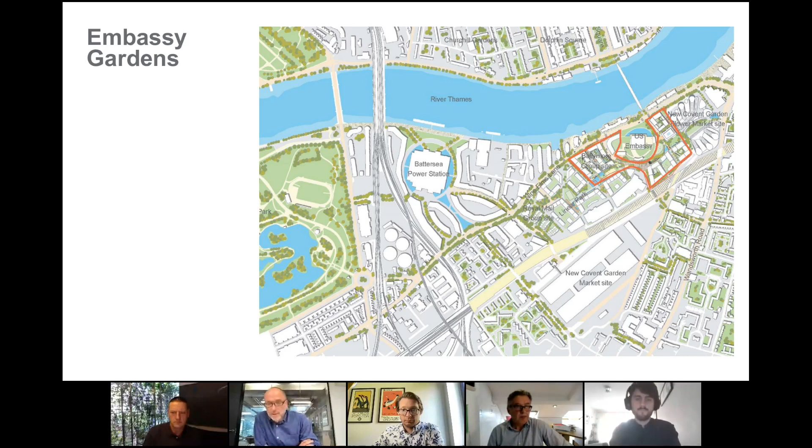It's also a critical part of the delivery and involves all the developers and landowners managing to communicate and talk to each other - this idea, which is picked up in the Farrell Master Plan, of a linear park, again linking Vauxhall Bridge to Battersea Power Station. In terms of the diagram, the blue dots are the Thames, the black dots at the base are the railway line, the Waterloo railway line. This idea of the park pulling people off the busy Nine Elms Lane, so pedestrians and cyclists use that link.

We worked alongside fellow architects AHMM and FCB on the first phase of the residential build, which was completed in 2012 for Ballymore, with the shared ownership building alongside for Peabody. These are essentially simple residential buildings which belie the density of the scheme and are rooted in its interaction with its location - brick buildings to ground, around raised courtyards, a southern facade with extensive views out over London, generous balconies over the new linear park.

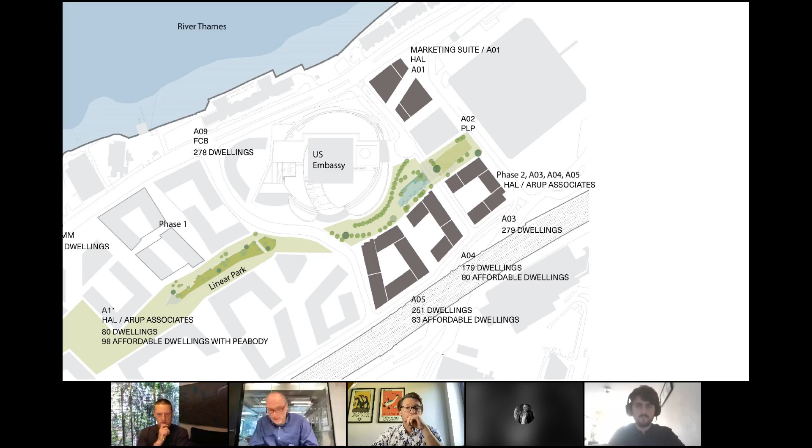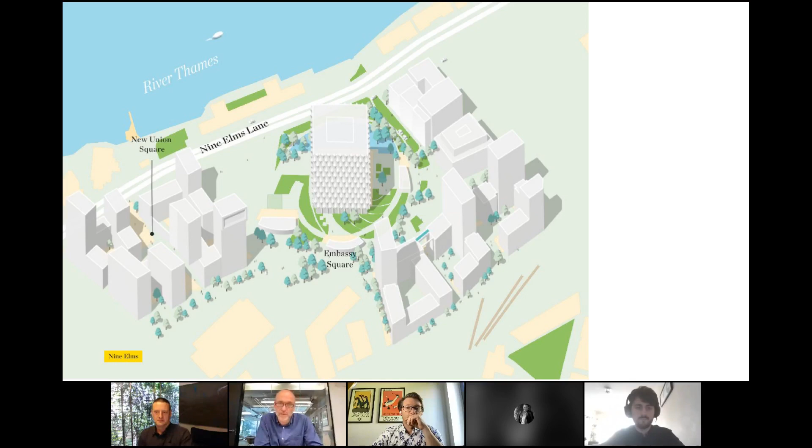When Ecoworld Ballymore asked us to help develop the next phase of Embassy Gardens, about 900 apartments across 3 buildings, we looked carefully at how it was integrated with the overall estate, building on the architectural language of phase 1. Someone's referred to it as a scheme of bricks, balconies, and bridges, and Skypool sits within the balcony, certainly within the bridge element of that.

As part of the client's brief, we were asked to provide a high level of amenity, such as pools, gyms, cinemas, working from home areas, and so forth, which was new to us - an offer more akin to a high-level hotel than a residential offer in our experience, presenting some new and interesting challenges.

As part of the phase 2 offer, we were asked to look at creating a 25-metre pool at level 10. So we're now going to talk about how the idea evolved.

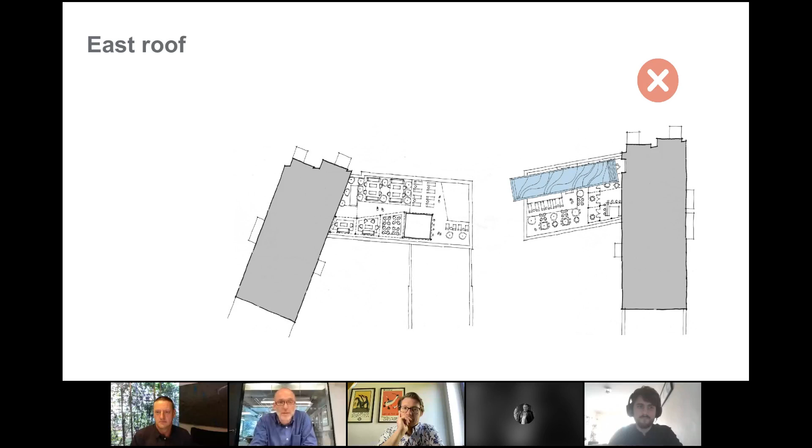We've got buildings to the left and the right, the pool shown to the right-hand side, the 2 roof areas with the gap between. If we placed it to the east, it wasn't going to fit. If we placed it to the west, it could just about fit, but there were concerns about the adjacencies of plant and not having enough room to breathe.

That led us to thinking about a bridging structure, placing the pool between the 2 buildings. The idea of a high-level swimmable bridge was born, which also had the advantage of providing direct access to the pool from both left and right.

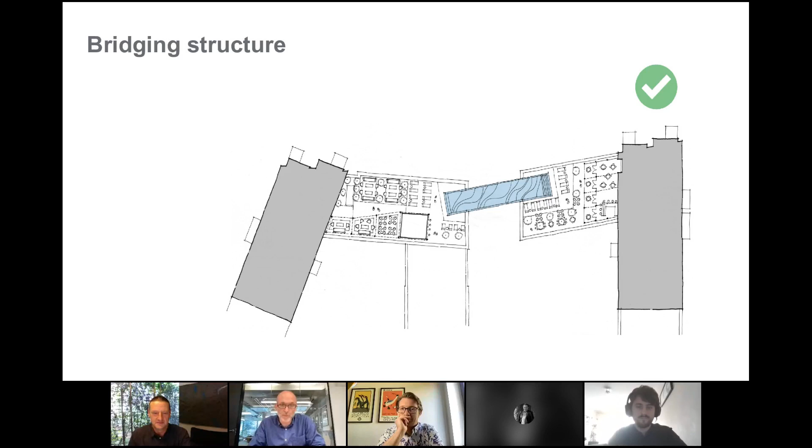The idea of a bridging structure holding water, or an aqueduct, was discussed at early meetings, and while we knew it was doable, we knew there were significant complexities in linking the 2 separate buildings. Graham and Sam will look at this later in terms of the settlement between the 2 buildings, one building being built before the other, and the difficulties in terms of movement between the two. There were also, as usual, challenges in terms of the cost plan, and we didn't really account for this pool in the original thinking and scope.

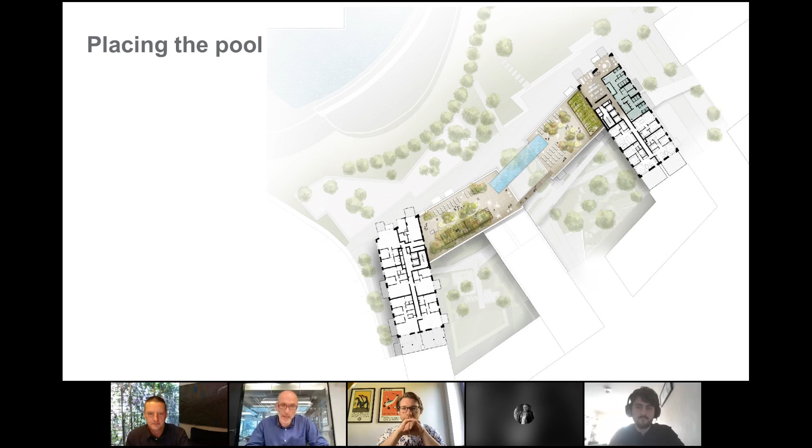The initial conversations centred more on an enclosed aqueduct filled with water for residents to swim across. The idea was that this would also create a framed entrance between the two buildings into the central courtyard from the American Embassy side, providing a striking landmark to waymark the entrance.

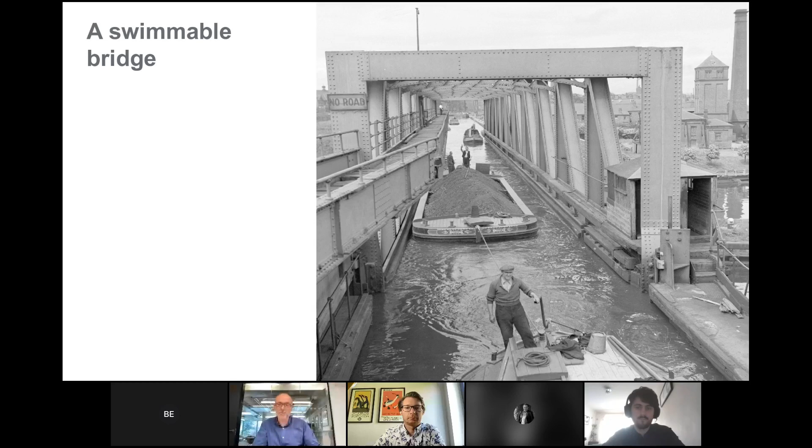Having established the idea of the swimmable bridge, we then began to think about views in and out, and the potential for taking advantage of both views across Embassy Gardens and to the north, across to Chelsea and into the West End. The discussion evolved towards providing windows to the structure, to allow swimmers to see out and passers-by to see in.

When we were discussing this with the client, in particular with Sean Mulryan, the chairman of Ballymore, and Peter McCall, who's the head of construction, the message was unequivocal. Sean said if we're going to do this, let's do it properly - it needs to be transparent. I remember leaving that meeting thinking, well, that's not going to work. While transparency was a brilliant aspiration, it was also a real headache.

We evolved initially a steel and glass hybrid, but the complexity in terms of detailing soon became starkly apparent. We'd end up with so many stainless steel fixings and the lamination, which would lead to further refraction through the glass, that the big idea - this brilliantly transparent vessel shimmering between two buildings - would be entirely lost.

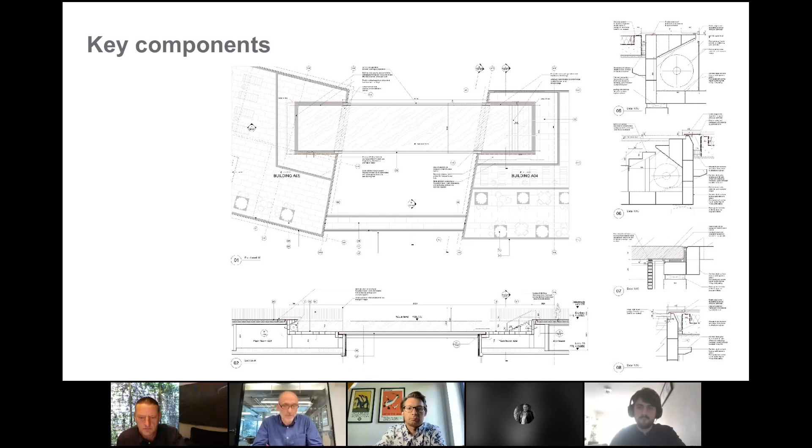The three elements - the clear central section and the stainless steel tubs to either end - are shown on the cover of the Skypool brochure, which we developed during the early stages to help us and others better understand the process. That process will be further picked up later on by Eckersley O'Callaghan.

In the meantime, a work in progress CGI found its way into the Evening Standard property section and attracted an extraordinary amount of interest. So while the concept was simple, it was clear that its implementation was anything but. I think it's fair to say that at this stage of the project, none of us were entirely sure that the image could be delivered, which is where Brian picks up the story.

Thanks very much, Hal. Can you hear me? Give me a nod or a thumb. Yeah, I am Brian Eckersley, one of the founding directors of Eckersley O'Callaghan.

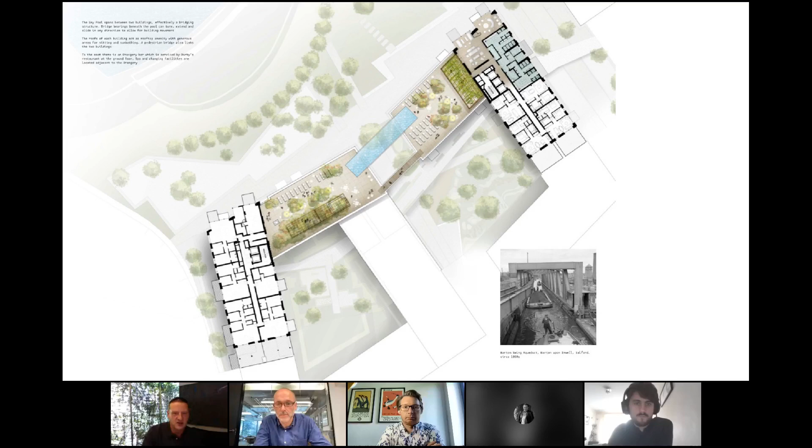So these were essentially the images that we were presented with - how to build something like this. And the reason Hal and Ballymore came to us - here we have the plan which shows the transparent structure spanning 15 meters between two buildings. As you can see, there's 5 meters of pool sitting on the building at each end, and this 15-meter span in between of transparent structure. It also doesn't span perpendicular to the two buildings - it spans at a skew angle, so that introduces some additional engineering and analytical complexity.

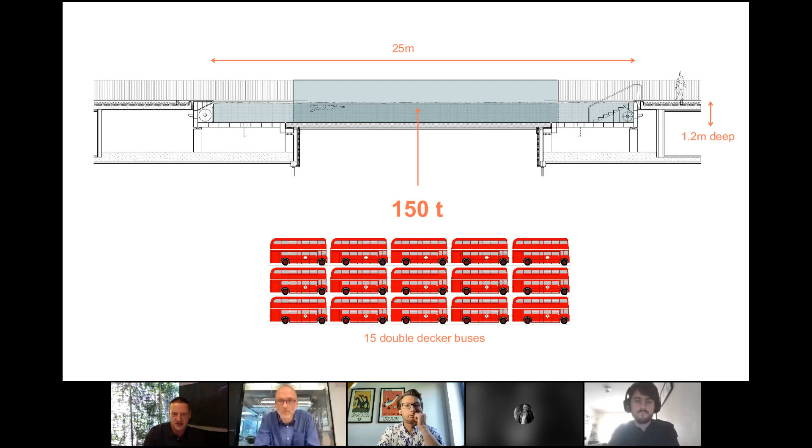And here we have it in section. In total, the pool is 25 meters long, 15 meters clear spanning in the middle. It carries 1,200mm deep of water, and there is this stainless steel tub at each end, which Hal described earlier, which forms the overall 25-meter length. It's 35 meters up in the air, 10 stories. In total, that is a weight of 150 tons of water, and as all good Londoners know, that is the equivalent of approximately 15 double-decker buses.

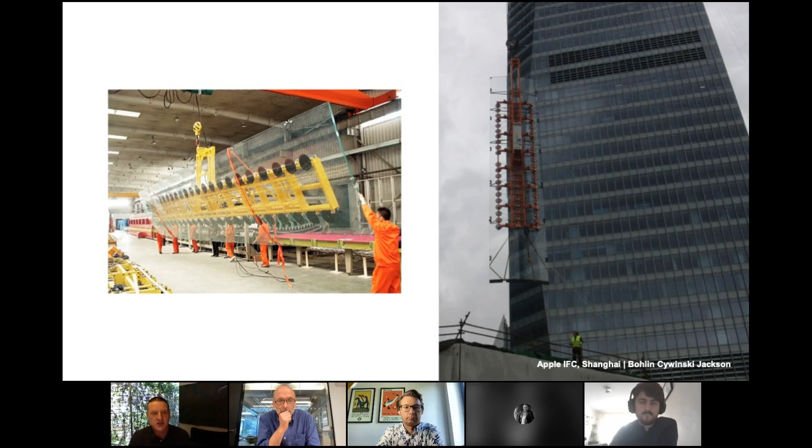Here we have what were at the time the world's largest laminated curved toughened glass panels, made for this project at IFC Pudong in China.

But of course, glass needs to be jointed, sometimes using fairly complex bolted connections. And for the engineer, that's where we have the most trouble proving that glass structures will work. These have to carry significant loads and ensure the safety of the occupants of any glass structure.

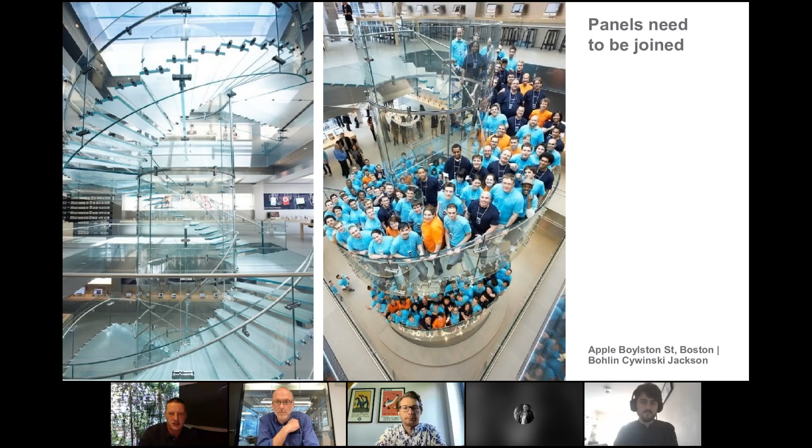So for Skypool, our first instinct was that glass would be the appropriate material to make this structure work. We did develop an early solution using glass, something like this. This simplifies it rather, but essentially there were these 2 big glass beams which formed the side walls of the pool. They picked up secondary glass beams spanning in the short direction, and those in turn supported glass panels along the bottom.

Then, in order to prevent the water pressure from pushing the big glass beams outwards on the side, we had these horizontal glass shelves which would restrain that load.

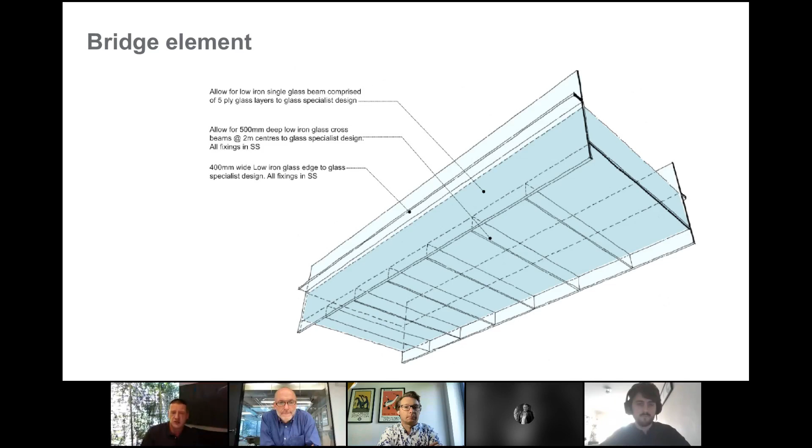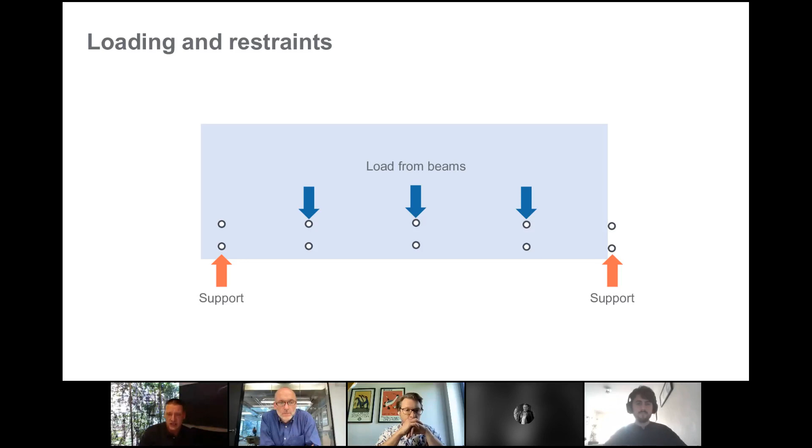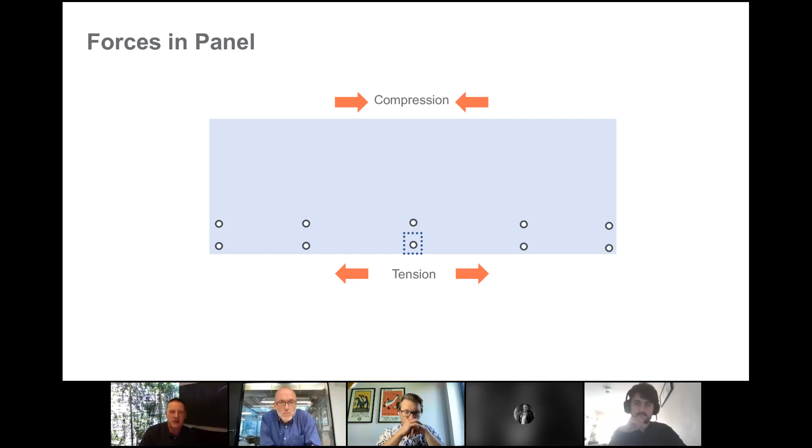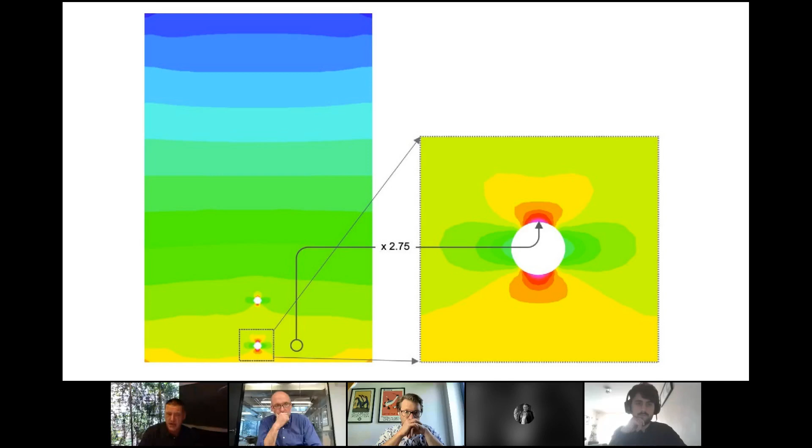But as you go through that solution, the loads at the end of each of those beams all need bolted connections. The stresses around those connections add to the stresses in the panels due to them acting as beams and carrying the load in the other direction, as well as the hydrostatic loads. You then get increasing stress concentrations around the holes, so the bolts need to get bigger and bigger to deal with those stress concentrations.

Here is one of our other staircase projects, where the balustrades of the stair act as glass beams, spanning about 12.5 meters in this case. You can see the connections needed just to carry glass treads, which become not visually insignificant in the overall effect on the structure.

And as well as that, even in carrying these loads, we have 5 pieces of glass laminated together to make a safe beam in this situation. As you add pieces of glass together, it gets more and more green, less and less transparent.

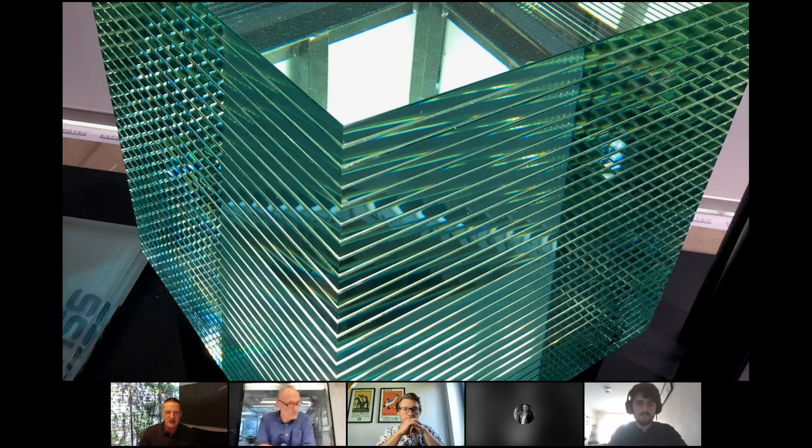Now, the Skypool solution wouldn't have needed as many pieces of glass laminated together as this, but you can see the visual effect. Transparency is reduced, the bolts further reduce transparency, the structure gets heavier and heavier. That means you need more structure to carry those loads, so you end up chasing your tail. It didn't really seem like the right solution.

So it was actually Graham Colt, our technical director who will speak shortly, who suggested that perhaps we might look at acrylic as the appropriate material to use. Acrylic is used in almost all aquaria, and in situations where it carries pretty significant loads. We have the walls of aquaria, which sometimes might be 10 meters high, so there's significant hydrostatic pressure on them.

There's also the project in the middle at the top there, in a hotel in Berlin, where there is a lift which goes up the middle of that acrylic tube, which is also an aquarium. I think that goes up 5 stories, so again there are significant loads there.

Reynolds Polymer Technology in Grand Junction, Colorado are the world's premier specialists in creating acrylic structures, and they've done a number of these projects that you can see on the screen. We'd worked with them on a number of projects in the past on much smaller scale structures, so we went to them to see if we could figure out a solution on how to get this built.

In very simple terms, this is what that solution was. We have this U-shaped acrylic structure, spanning 15 meters, skewed as we said. It has those stainless steel tubs at the end. The whole lot is pulled together with tension rods, which enables everything to move together, sitting on top of these buildings.

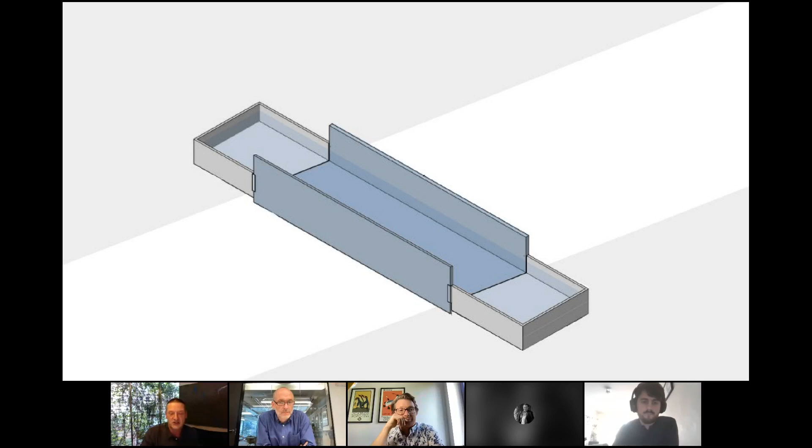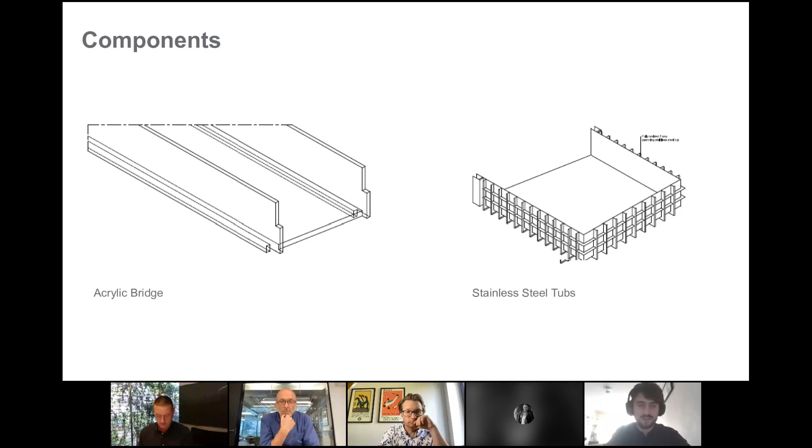So yeah, I'll just touch on a few of the interesting design considerations. As was mentioned previously, it's 2 elements: the acrylic bridge that spans the 15 meters, and then what we affectionately call the tubs, stainless steel tubs on each end. So I'm going to focus mainly on the acrylic and how that spans. You've got all the kind of typical loading cases that you'd expect.

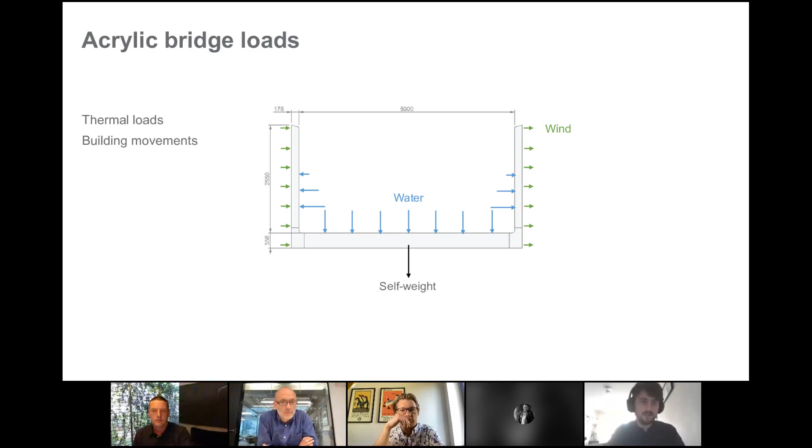But taking a step back, firstly, we had to design to acrylic. Unfortunately, there's no British standard, no Eurocode or guidebook that tells you exactly how to design an acrylic swimming pool. The closest we could find was this American standard called the Safety Standard for Pressure Vessels for Human Occupancy. Although there was some useful information in there, really it was geared towards these, which you see on the right, which is a submersible or a submarine, where you've got this kind of acrylic bubble.

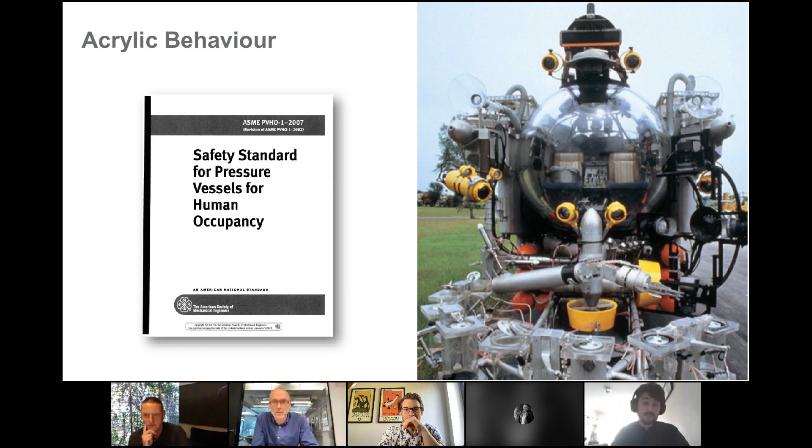So it wasn't really what we were looking for. So we relied on the expertise of Reynolds Polymer, who constructed it, and their years of experience, working from first principles on what we knew about the material.

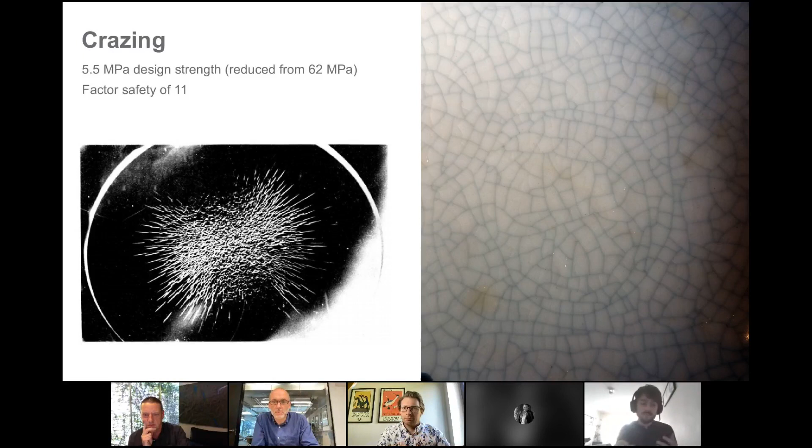So what does this mean in terms of design? Crazing happens under a number of different scenarios, one of which is tensile stress. If it's being stretched or pulled apart, you'll get these micro cracks forming on the surface, and this happens at a much lower stress than the stress that would break it. So instead of designing to our original 62 megapascal tension stress, we were actually designing to a much lower stress of 5.5 to make sure this whitening effect doesn't happen.

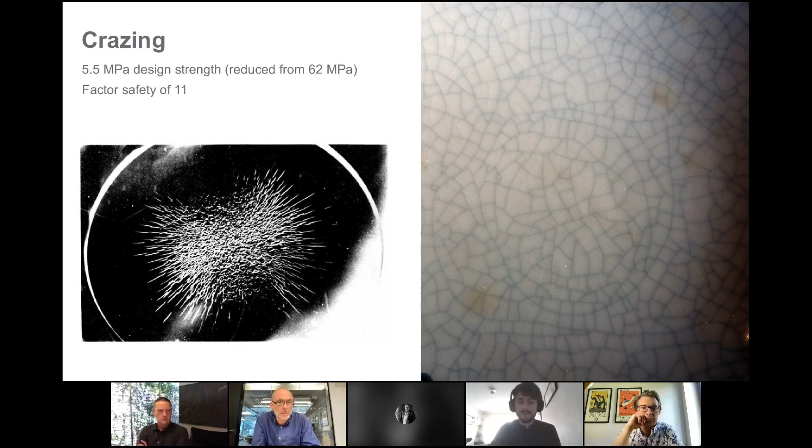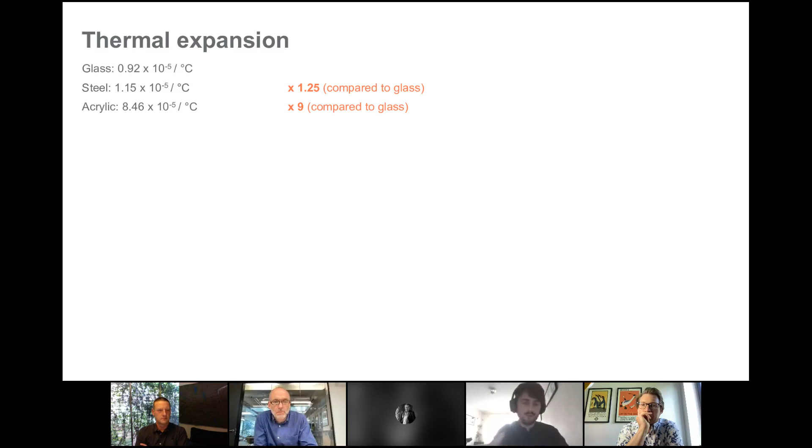Another really interesting thing about acrylic is its thermal expansion. All materials have a degree of thermal expansion - basically growing when hot and shrinking when cold. Here I've got some numbers for comparison: glass, steel, and acrylic. Steel expands about 1.25 times more than glass, and acrylic is 9 times more than glass - 9 times more expansion and contraction for a given temperature change compared to glass. That's significant, and I'll talk about how that manifests itself in the design.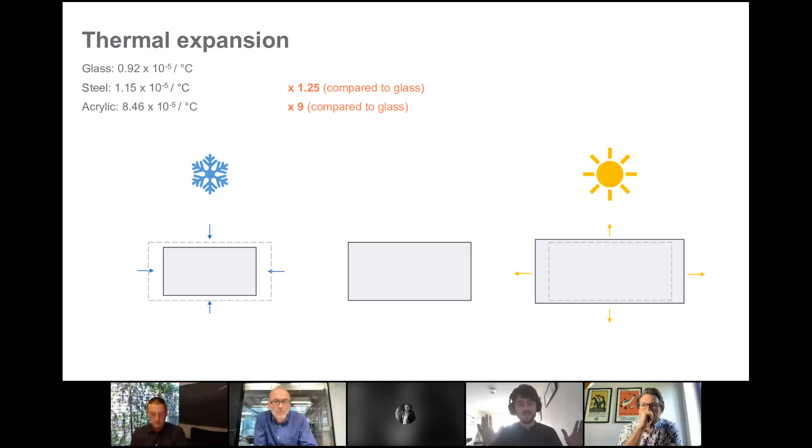Just to be clear, here we've got a piece of acrylic in the middle, and when it's cold you see it shrinks. At hotter temperatures you'll see it grows.

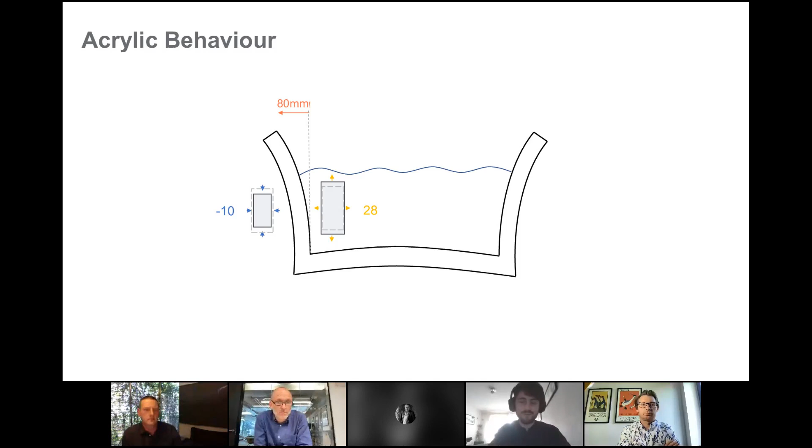One of the interesting ways this manifests itself is we've got hot water, 28 degrees, inside the pool, and on the outside, on a winter's day, maybe the middle of the night, you'll get like -10 degrees Celsius. So on the inside the acrylic is trying to grow, and on the outside it's trying to shrink, so you get this weird bowing effect. We actually saw this in one of the first weeks of it being built. As per validating our calculations, we saw quite a significant 80 millimeters of the top moving out. So that was one of the interesting things about this pool and the design.

And just to compare, this heavy water we mentioned earlier - when that weight comes down, you actually see the sides moving inwards, not moving out, but because the bottom is bending, you see the walls moving in as a reaction to that. Compared to the 80 millimeters, we actually only get 5 millimeters. So you can see that thermal effects from a deflection point of view are a lot more significant than the weight of the water.

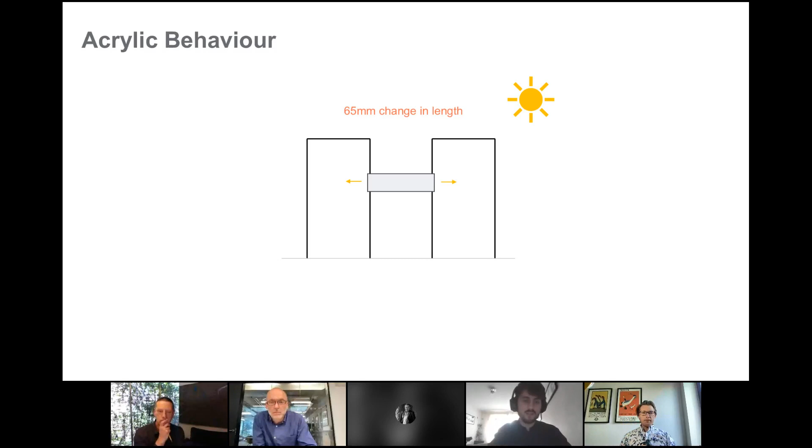Another thing is that on a sunny day compared to a winter's day, on a summer day it will be 65 millimeters longer, and this movement has to be accommodated. It's not just the movement of the acrylic due to thermal expansion, but the building movements we need to accommodate too. All buildings move when the wind blows to some extent. So we've got a differential movement of the two buildings there, 85 millimeters. And then we've got potential settlement of one building versus the other, especially as one site was built a lot earlier than the other, which may potentially settle quicker than the other one.

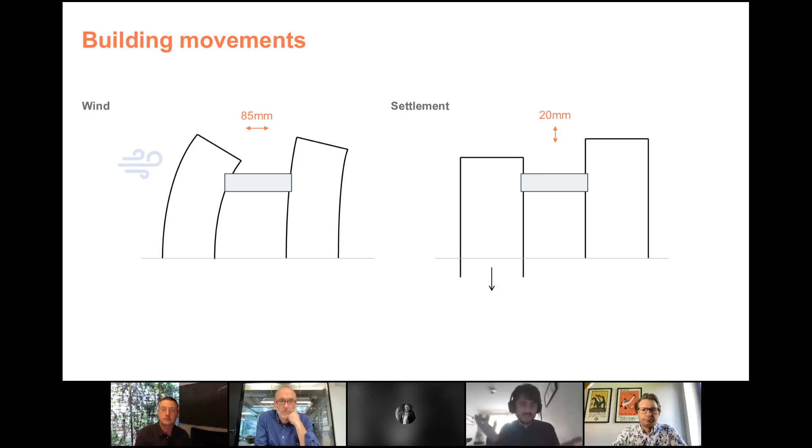So how do we deal with all these movements? Well, essentially the same way that you deal with movements of any bridge. It is a bridge, it just happens to be a transparent acrylic swimming pool bridge. But we deal with these issues in a very similar way.

This allows the buildings to move differentially to each other, allows the acrylic to grow and shrink. This is really important, because if we trapped it, if we locked everything in, then as buildings moved, as the acrylic wanted to move, you'd build up all this tension, this strain, and lock that strain in. You want to be able to free it and let it move and breathe as it wants to. That's the way you deal with these issues.

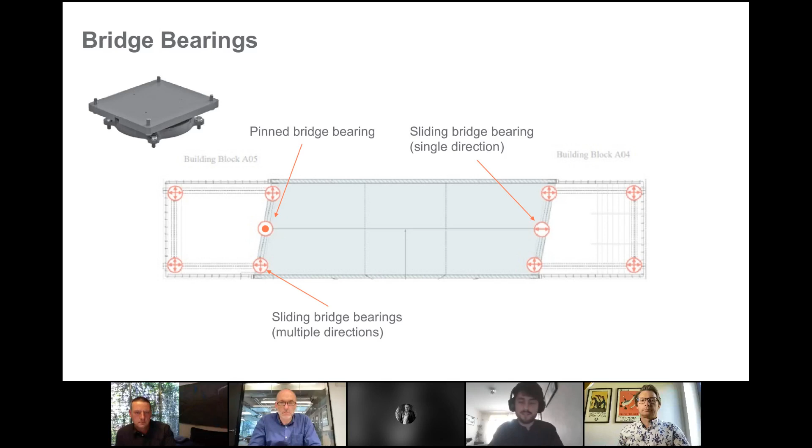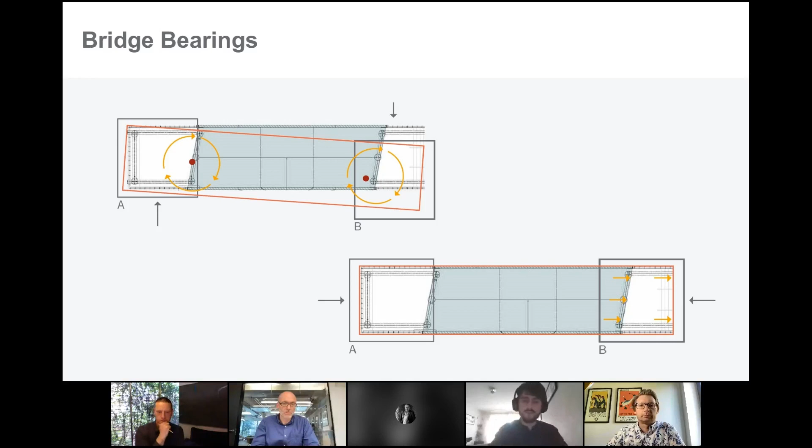So here we've got buildings moving differentially to each other, up and down on the top there, and you can see how they pivot about these points. On the bottom, you can see that as the buildings move towards and away from each other, or the acrylic expands and contracts, you've got the bearings on the right-hand side sliding to allow that movement. So that was one of the real key things about this design.

In terms of the settlement of the buildings, we've got hinges essentially at the ends of the acrylic, and that allows that movement to happen at that location there.

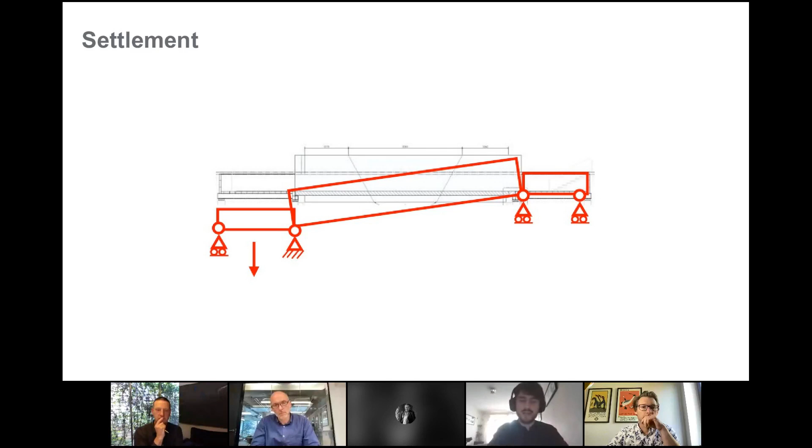One thing that was very clear was that we don't want to bolt into the acrylic, because as Brian alluded to earlier, bolts cause stress concentrations, and that's even worse in acrylic. Whereas you can get away with it because of the strength of glass, you don't want to do that for acrylic. So no bolting, that was out of the question.

And we've got this silicone joint to stop the water leaking. But what happens if the building moves and you've got a bit of pull on the friction in the bearings, or the acrylic is trying to shrink away from that side? What happens to that joint? That's really critical, that we make sure that silicone isn't going to pull apart and we start getting leakage there. That was another key thing we had to consider.

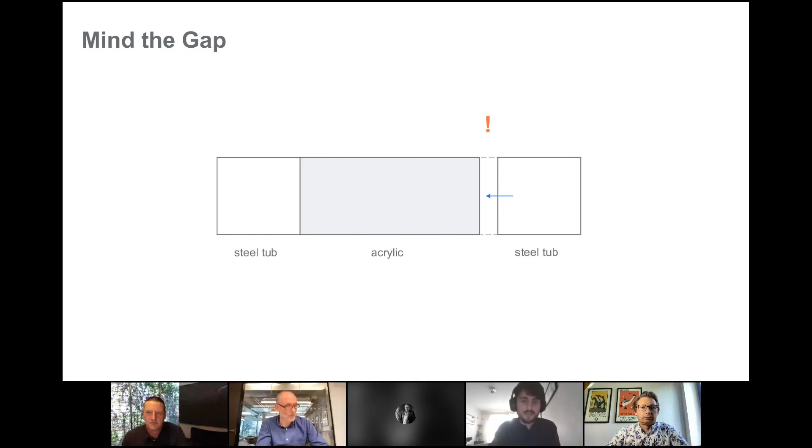The way we dealt with that is by introducing these tendons that were also mentioned earlier. We've got two tendons running underneath the pool, pre-tensioned to provide this compression at the ends of the pool. That means this silicone joint is never going to get pulled apart. We're keeping a nice even pressure on that, making sure no leakage is going to happen there. Of course, you can't just tension it.

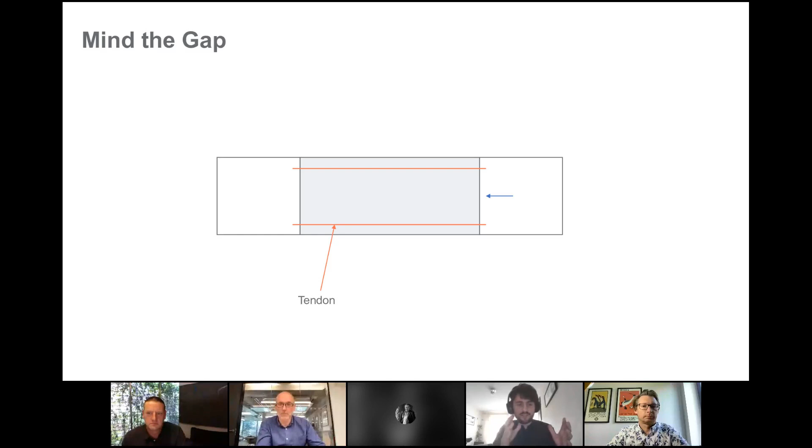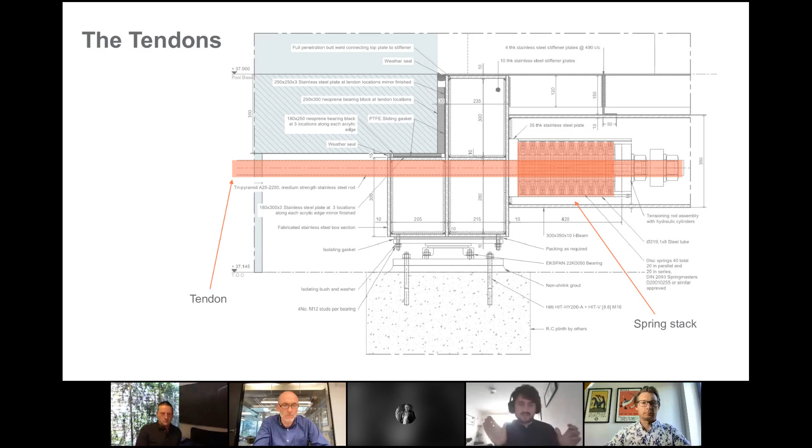You can't just tension the tendons and put that compression without allowing it to breathe as well. So what we've done, if we zoom in to the springs on the right there, is introduced a spring stack. That means we're allowing that compression to always be there by tensioning the tendons, but we allow the springs to take up the movement of the pool at the same time.

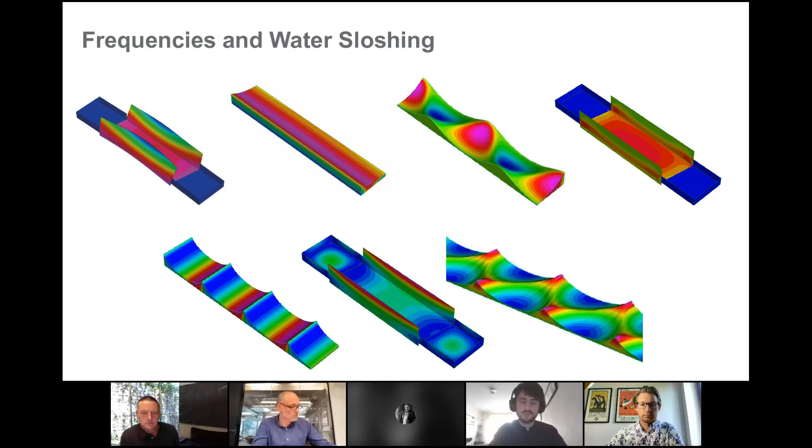Some other things we looked at were the frequencies of both the structure and the water sloshing. We had to make sure these frequencies weren't going to be very similar, causing resonance between them, because if the water sloshed at the same frequency as the structure's frequency, you'd get this build-up and movement. So that was important to make sure wasn't the case.

And now I'll pass you on to Graham, who's our technical director, and he's going to talk us through the construction and testing of the pool.

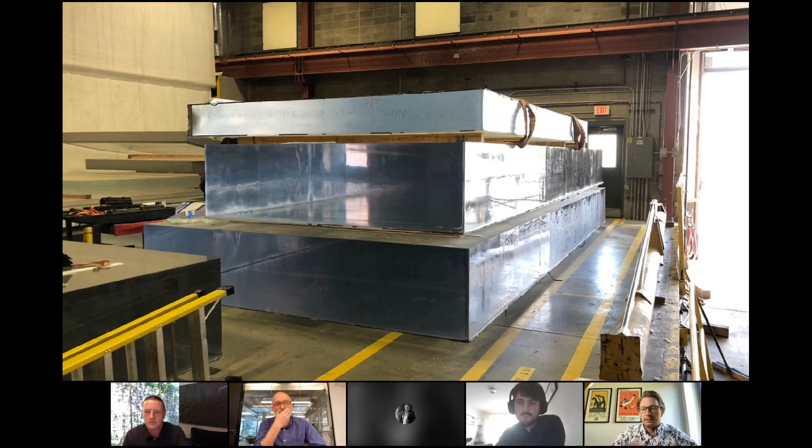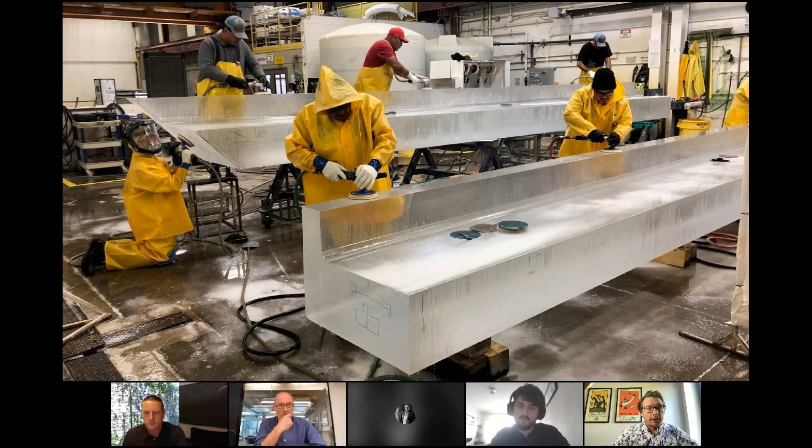Following that stage, the scores and marks left by that cutting head are polished out by hand. For this project and for Reynolds projects, there's a huge amount of hand polishing taking place with highly skilled labor, and that's down to the fact that there's not a better way of doing that, and it really achieves a high level of quality.

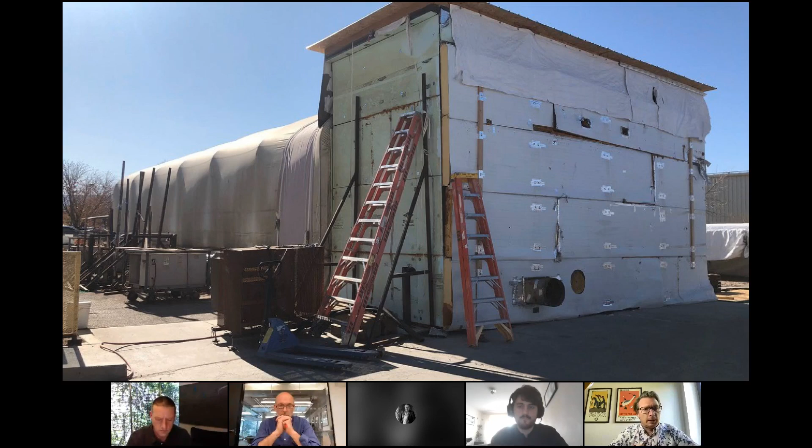I mentioned earlier about the weather. So when we're bonding acrylic together, that has to be done in a carefully controlled environment, particularly with regards to temperature - as Sam's mentioned and Brian's mentioned earlier, temperature has a large effect on the size of acrylic. So maintaining temperature during all the fabrication is really very important.

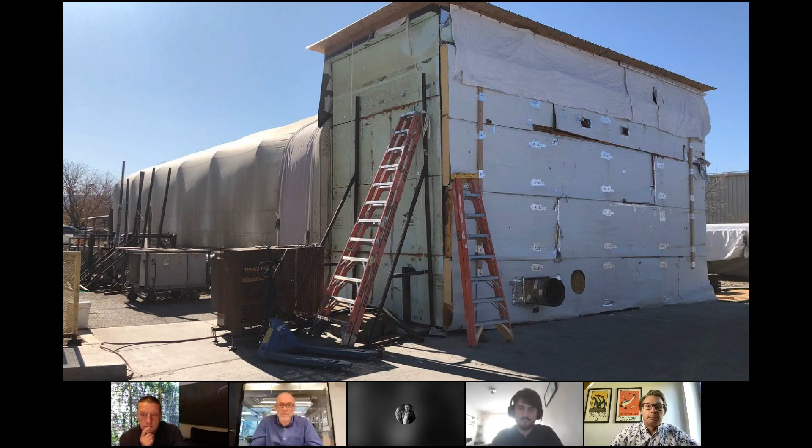While Reynolds have internal ovens within their factory, none were capable of fabricating the complete size of the pool. So this specially erected outdoor oven, as we call it, was erected in their yard.

Within that, they had carefully fabricated and designed other machines to enable the processing of the acrylic to the quality required. Here on the rails, you can see another end mill going along and polishing the edges of the floor panels, which have been joined together, ready for the rail strip which will be added on.

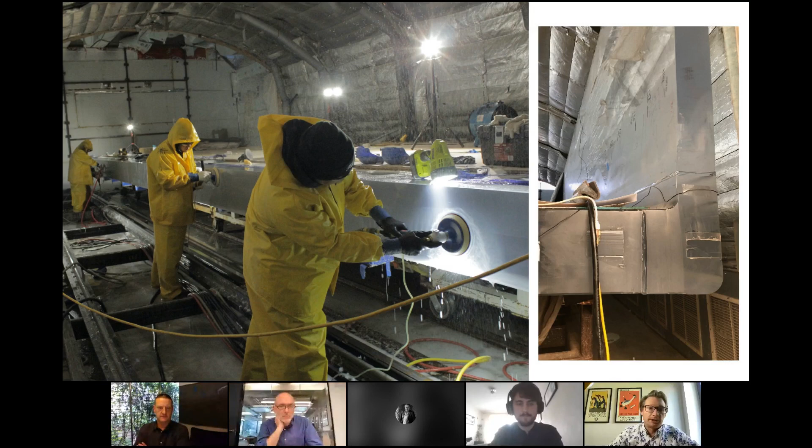Again, a lot of manual polishing to take out the scoring and roughness that remains after that cutting head. And you can see on the right-hand side the vertical wall, then attached to the floor panel.

Bonding two materials together, particularly acrylic with a resin, is not a simple process - largely because we're talking with very heavy panels. The wall panels are about 12 to 13 tons.

When that syrup is poured into that gap, first it goes through an exothermic reaction - it expands, gives off heat, creates heat and expands. As it starts to cure, it starts shrinking again, and it shrinks back past the original nominal joint width. So if those two panels were kept rigidly in place, you'd generate tension loads in that syrup, and you'd form cavitation and bubbles. Obviously bubbles, along with being aesthetically undesired, can cause stress concentrations in the material too.

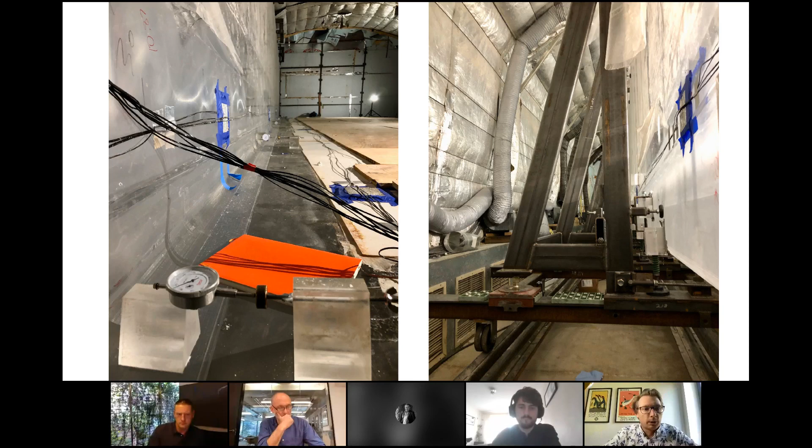So Reynolds' expertise in this was really incredibly interesting from an engineering point of view. We can see that they have these stillages in which different components can move apart and come back together. On the left-hand side, you can see the dial gauges, which show the preciseness required in these joints. And all the cables running around in the image are all thermocouples, consistently measuring the temperature of the panels.

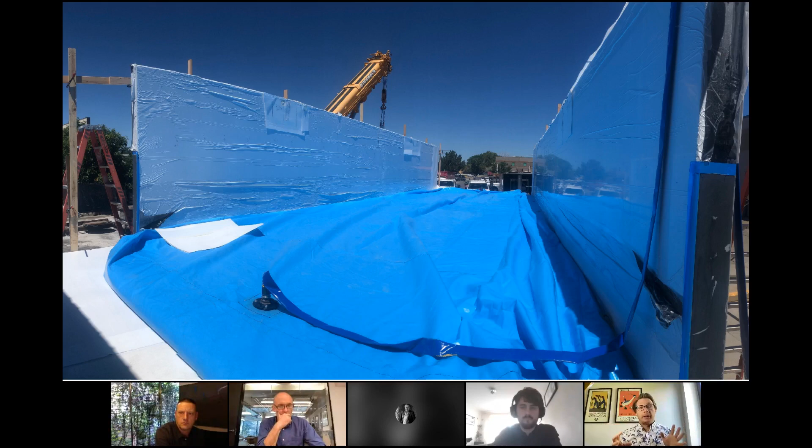As with any project where we're really trying to break new ground, testing is a very important part of it. So when the pool was fully constructed and we wanted to carry out some load tests, rather than cap the ends—at this point the stainless steel tubs had been installed on site—we decided to put a bladder in the pool and fill that with water.

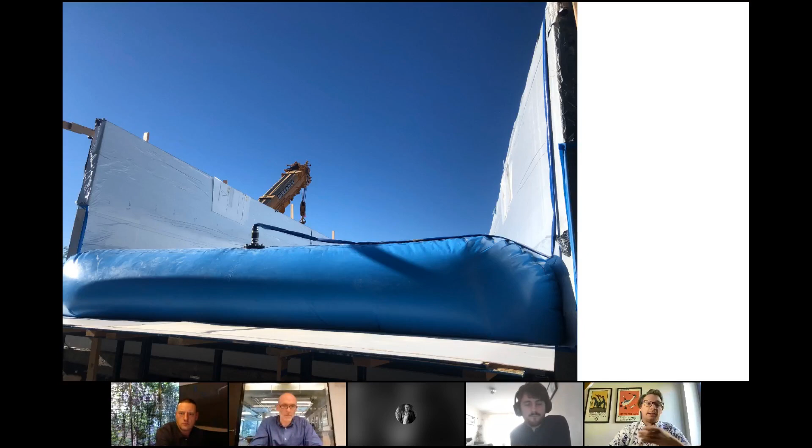We filled it up in increments and measured how the pool reacted in terms of deflections. Here's Lisa and Isabel—as this was during COVID, still running around the world, Lisa and Isabel had the chance to come over from the Los Angeles office to do that inspection.

Following that, it was finally polished on site before being visually inspected. Here you can really start to see it's got an amazing quality to it, and it's really transparent—you can see a slight ripple through the wall. But to us that was perfectly acceptable, given that we're going to have water sloshing around in this at the end.

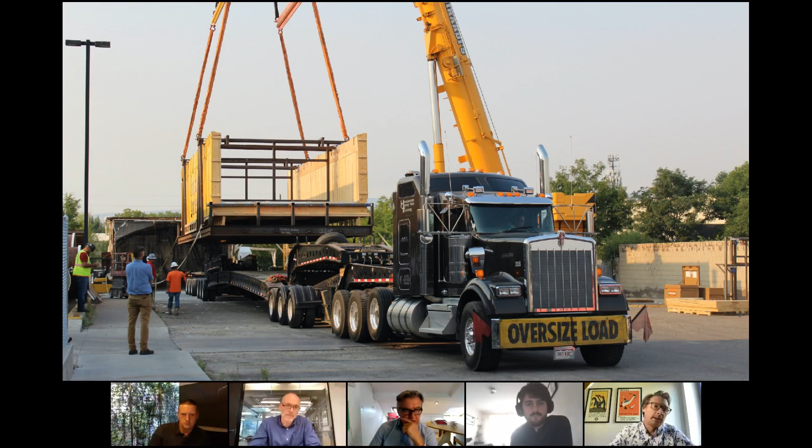So on to transport. It was carefully packaged up in this designed cradle and lifted onto a Kenworth truck on its way out of Colorado onto Galveston in Texas. Following shipping and a brief stop in Antwerp, it arrived in Tilbury—and I'd really suggest if anybody has a chance to go to a container port, it's a fantastic place. Amazing cranes, and things are a completely different scale.

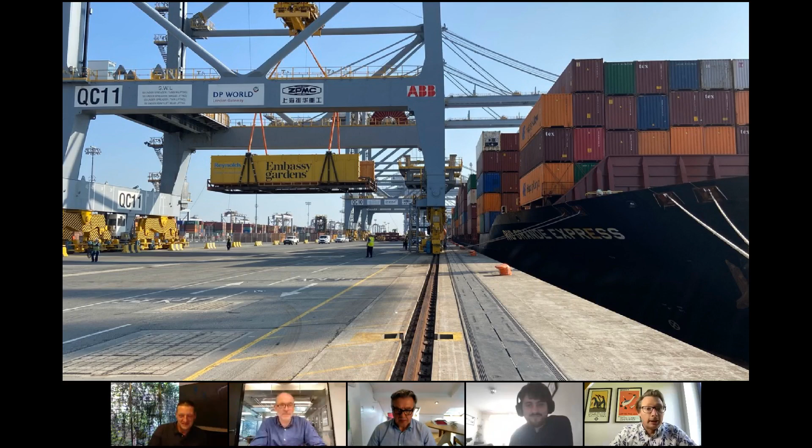Anyway, so it was lifted off, and for its trip to site it was placed on a barge. The barge actually docked in Docklands overnight, and at about 4 o'clock on Saturday morning, Brian was there taking pictures of it being loaded onto its very short transport to the site.

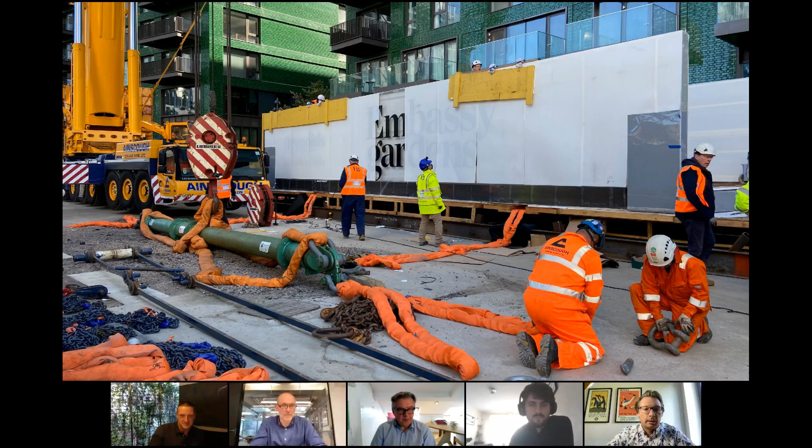The following day it was broken down out of the crate, and last visual checks were made for any damage, because this was the first time it had been seen since it was packaged up in Colorado—just to make sure we're happy for the lift to go ahead.

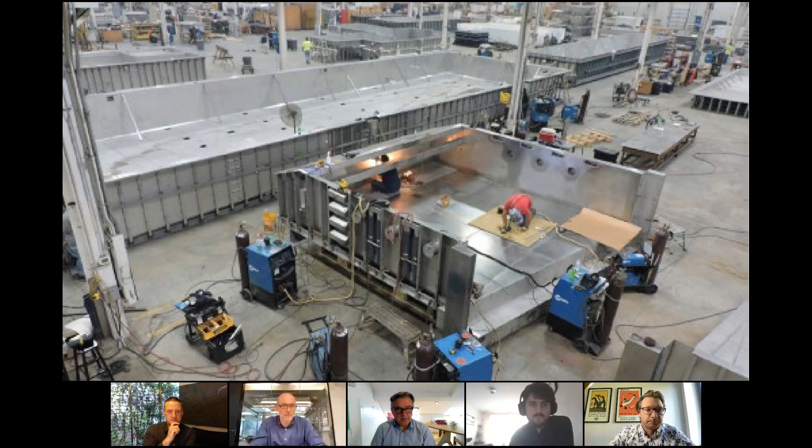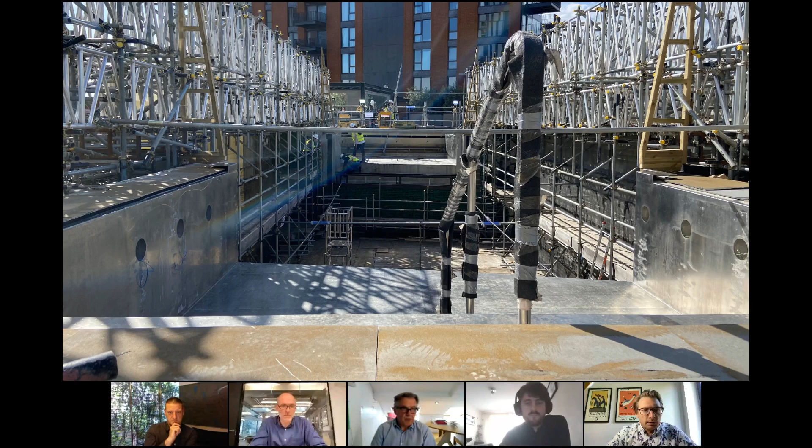As you can see, these are the steel tubs which are already in place on site, and you can see that Bradford, who manufactured it, had great experience of fabricating stainless steel structures. Here they are, the two tubs either end. We have a crash deck from scaffolding in between, and some scaffolding between the two buildings to hold all that in place.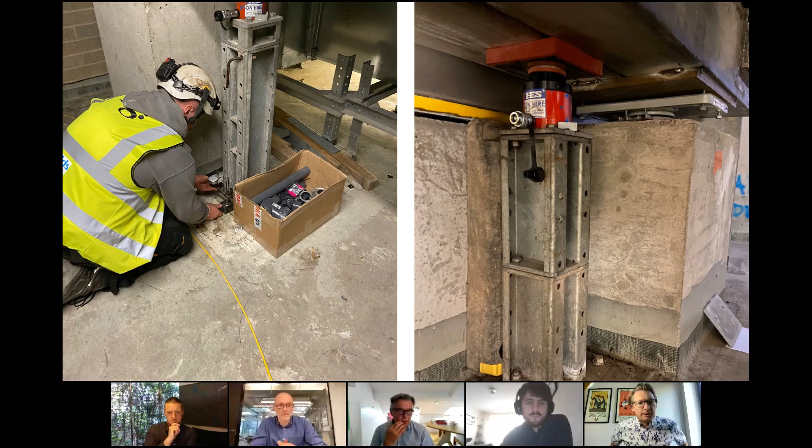Underneath the steel tubs you can see these steel temporary props with temporary jacks in red above that. Just to the right of that temporary jack, you can see the outcrop of a stub column in concrete with the permanent jack. We used a temporary jack, so the construction methodology used temporary jacks, because that would allow the leveling of those tubs to take place. As soon as the loads came on, there could be some further fine adjustments at the end.

You can also see the chap on the left just putting a dial gauge in between that steel stub column and the concrete. What we wanted to do was make sure that as we put the load from the tension rods into the tubs, we wouldn't have movement.

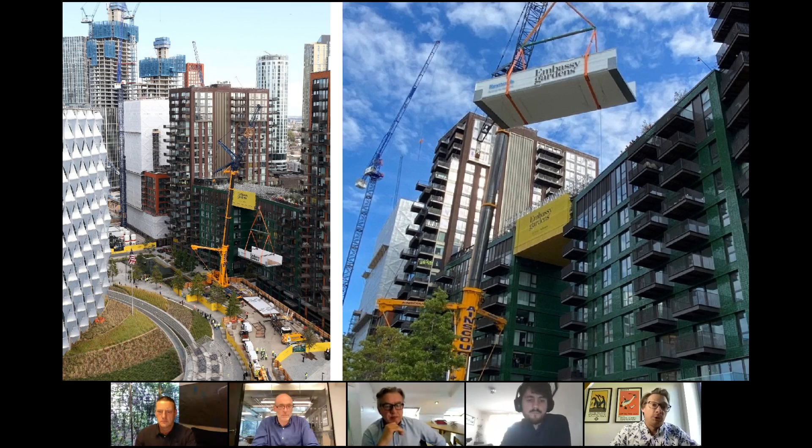So when the day came, some very careful eyes were kept on the forecast, particularly the wind load. It is lifting 55 tons, and that's a 500-ton Liebherr crane—750 tons was expected, but due to a problem elsewhere they couldn't provide that. So there was even more focus on the wind load, but it happened without any delay.

For such a large, cumbersome structure, the rig lifted did an excellent job lifting it into place with 10 millimeters to spare each side. This is the compression stack on the left of Belleville springs, which are conical shaped springs, and this is the hand jack on the orange table in yellow, sitting on a stool, which pulls the threaded end to compress the Belleville springs on the opposite building.

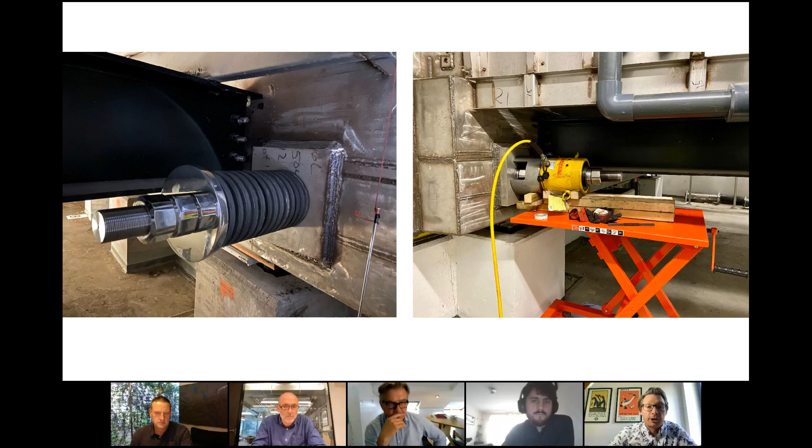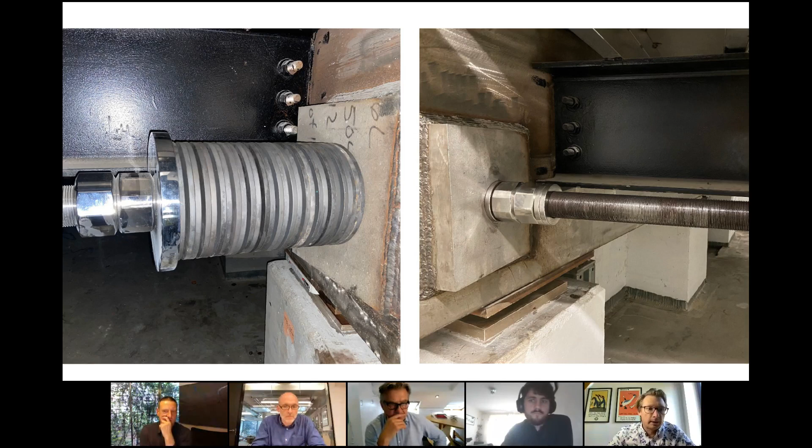These were hand operated, so it took the operator a fair old time to put the load sequentially into the two rods, and we were there till gone 1 in the morning. But you can see here now the completed load has been transferred into the spring stack.

This is a view across the end of the plant room. You can see both spring stacks, the small one just underneath the black beam in the distance, and the load is still at this point sitting on the temporary jacks. But because it's all been compressed together, it now has its stability system in place, so at the end of the night the crane load could be taken off the crane and go on to its next site.

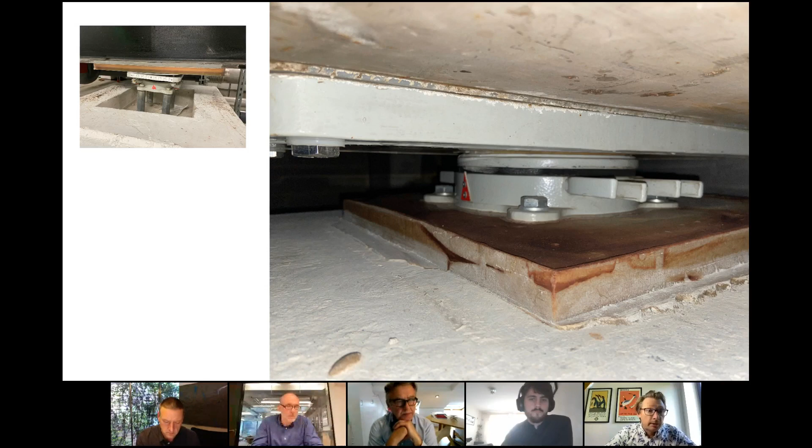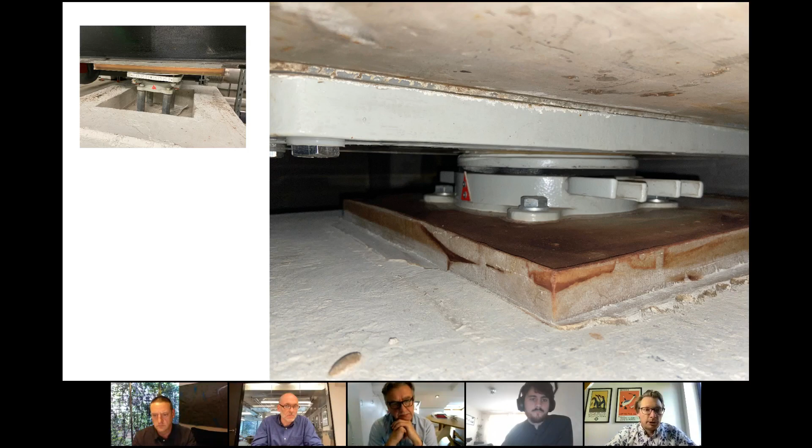After that, in the top left-hand corner you can see the permanent jack, but it was ungrouted, and once that was fully grouted, as you can see in the main picture, the load could then be transferred to the permanent jacks and it would be in its final position as the design intended.

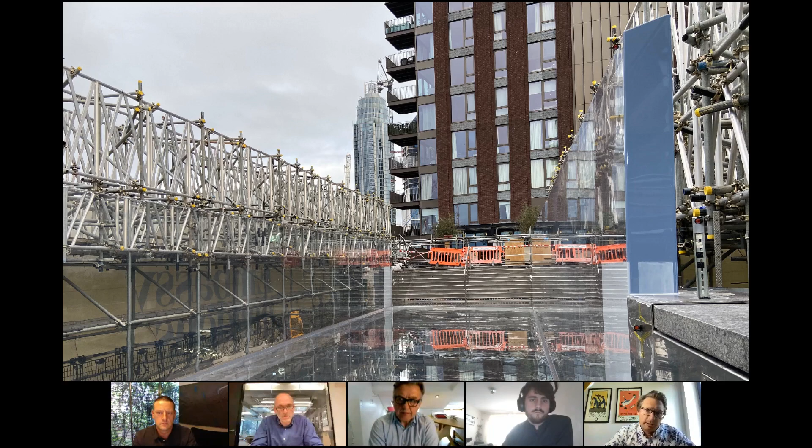So the first time at this point that we could start taking the film off, we really started to appreciate the clarity of it. Looking into this, the upstand beam on the end here, that's 15 meters deep of acrylic you're looking into. You can really see there is a slight bluish tint, but it's absolutely superb, and it surpassed our expectations of what we were expecting to see.

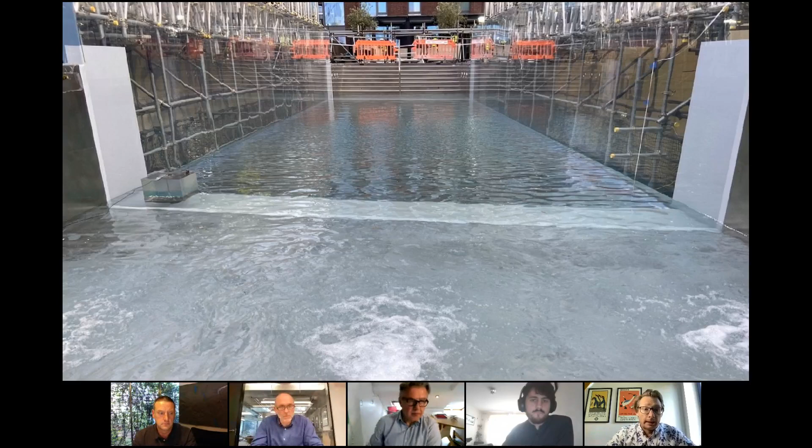Again during commission, what we were doing was verifying the completed structure. So we performed staggered fills, loading the water depth by 20 centimeters, and we were monitoring deflections during that period. Towards the left of the image there's an acrylic block, and that's how we measured the acrylic temperature.

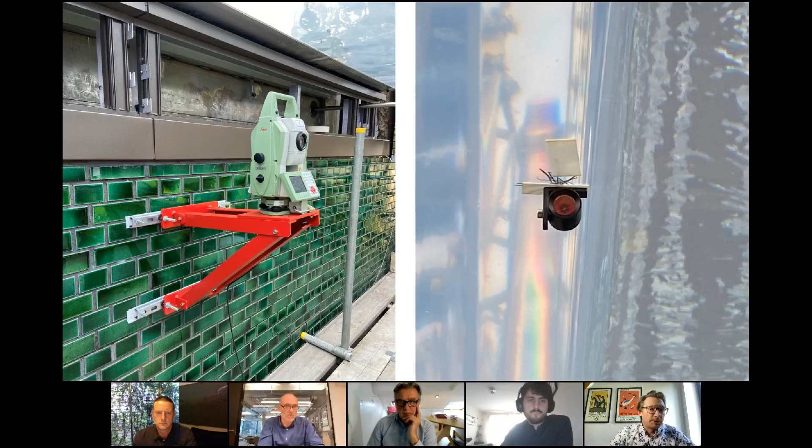To take those measurements, we had a total station on each building. As we know, the two buildings would move independently, so looking at those two total stations we can subtract and find out what the actual movements are. We also had these telltales, or reflectors, bonded to the acrylic, which we could take measurements from.

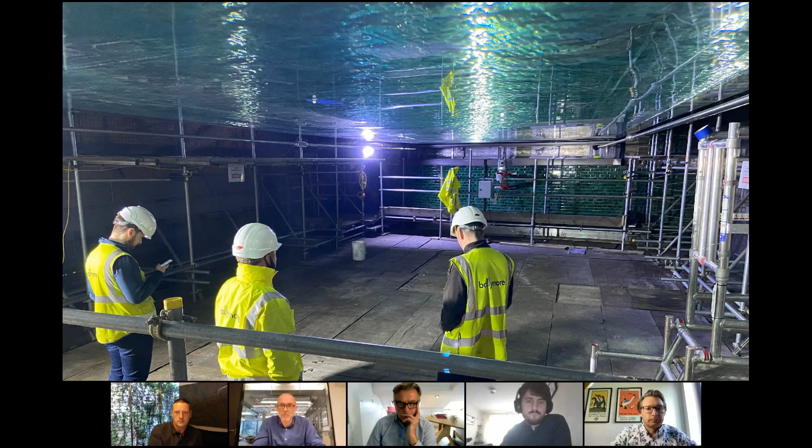At the end of the day, what we did see was this wonderful play of light from underneath. It really looks as though, at full depth, the water is just a small puddle underneath. The clarity is really wonderful.

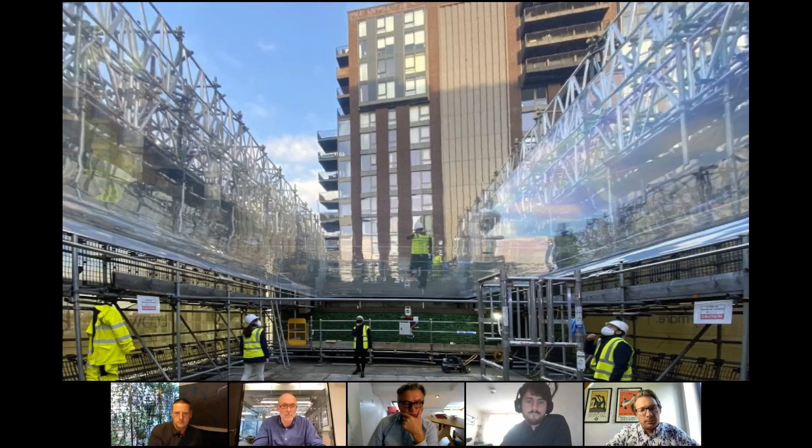Next we also have a drain down before the final fill and final inspection before we hand over to the client. But you can really appreciate the clarity of this now, and it just built on the excitement, certainly from an engineering point, that it's really coming to life.

So a little bit about sustainability now.

Sustainability and circularity of material has become ever more important. At the beginning of the project some time ago, we were aware that acrylic could be mechanically recycled, that is, chipped up and reused, but that does degrade the material, so it's really a once-only process. However, it was great that on signing the climate agreement, or the climate emergency, we went back to look at those decisions and see what changes had happened.

So we went to Mitsubishi, who are the manufacturer for the base polymer that Reynolds used. What they're now doing is taking acrylic and reprocessing it, what they call depolymerization, which is jargon for taking the plastic and turning it back into its base material, indistinguishable from virgin made material. There is a slight loss as it's cleaned during that process, but it's rather marginal. It also means that creating that new virgin material is at an energy reduction of 60 to 70% compared to making it from virgin chemicals.

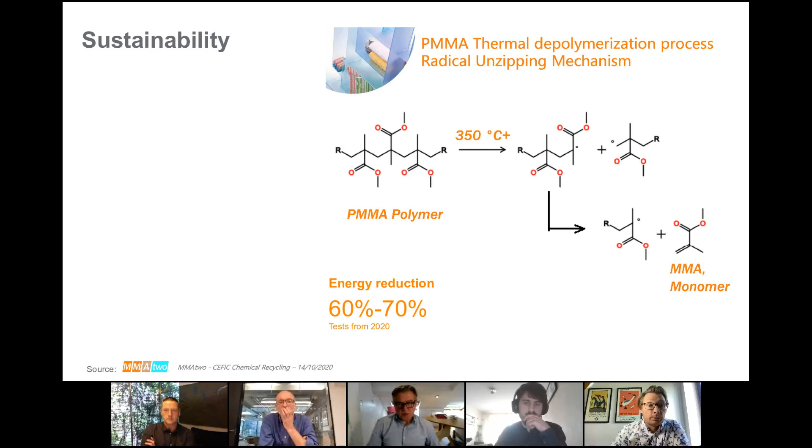The realization when we hand it over to the client and it's fully filled is really rather amazing. I think it set out to do exactly what the client's brief was. It's as though you've got a big pool of water sitting in between two buildings, with really nothing holding it there.

You always want to look back at the renderings and see how it performed, but in this case it surpassed that in many ways. We're all very pleased with the results, and I'm sure you've seen those a lot in the press recently and in various places.